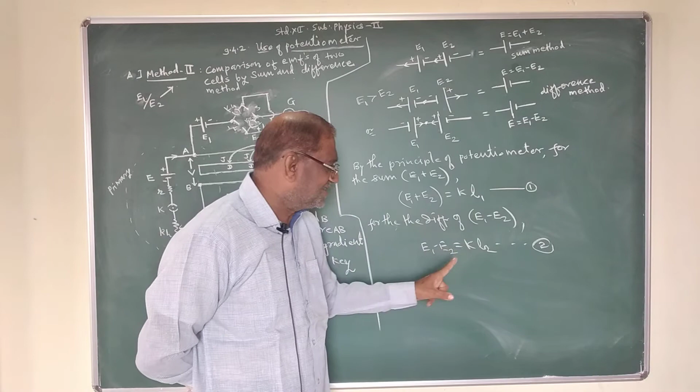This condition is called the balance condition of potentiometer for the difference of EMF of two cells. This difference balances the potential difference across length L2 of the wire, so that the galvanometer shows zero deflection, giving E1 minus E2 equals K L2 by the principle.

This is the first set, this is the first reading. Now we can take different readings if we change the applied potential difference.

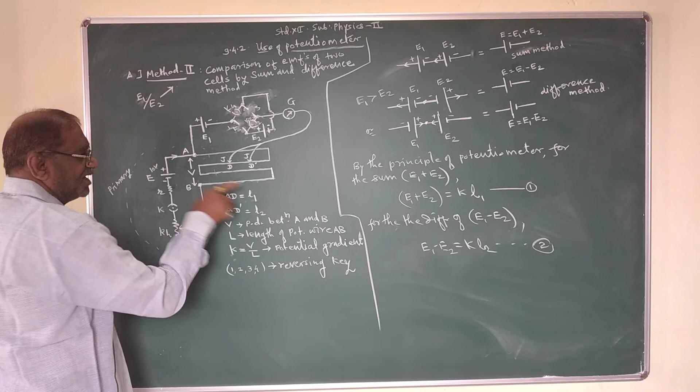With the help of the reversing key we can directly change this combination of two cells from sum method to difference method, that is, assist combination and oppose combination. We can change directly with the help of the reversing key for a particular applied potential difference.

Then you measure the corresponding balancing lengths L1 and L2, obtaining a number of readings of L1 and L2. Now from this equation, dividing...

E1 plus E2 upon E1 minus E2 is equal to L1 upon L2, equation number 3.

Now by using a mathematical rule, the componendo and dividendo rule, we can write this.

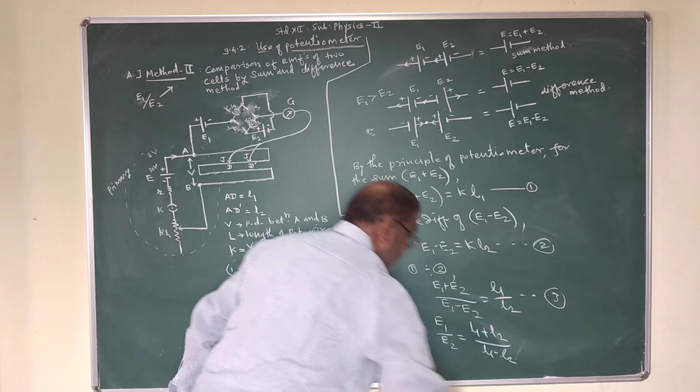These are the balancing lengths for the sum and difference of EMF of the two cells. We can directly measure them with the help of a meter scale, because this instrument is itself fitted with a meter scale, by which we can directly measure the balancing lengths L1 and L2, so that L1 and L2 are known.

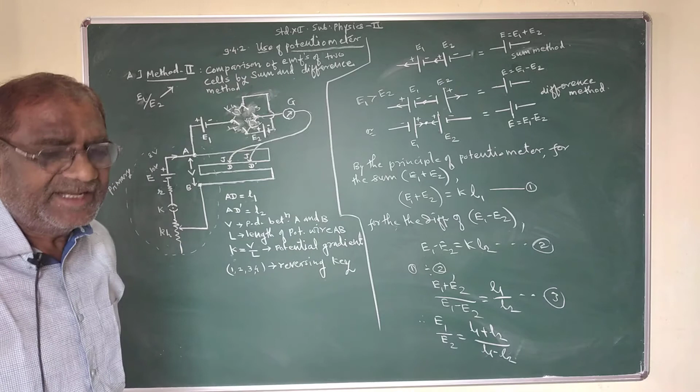Then by using this formula we can compare the EMF of two cells. So this is the experiment, one of the methods by which we can find the ratio of EMF of two cells.

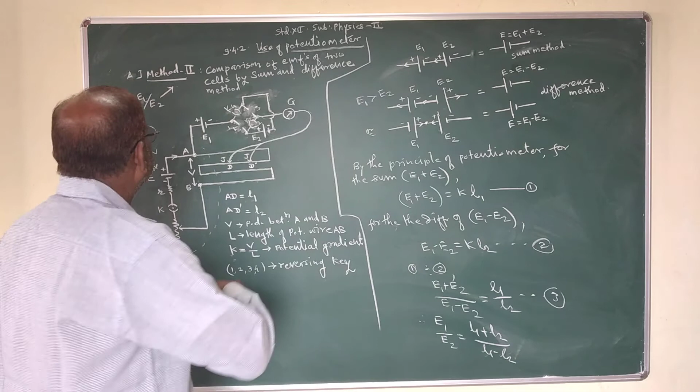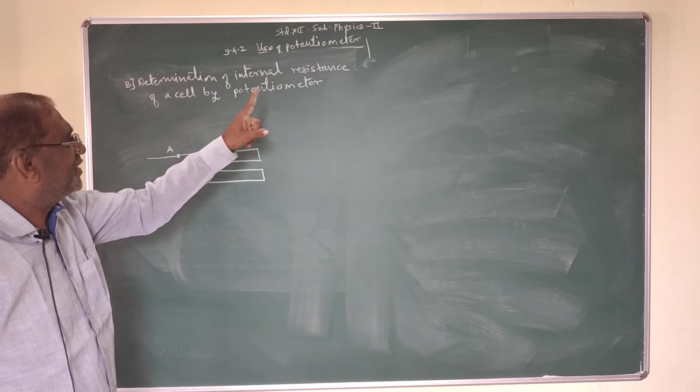Now the next article, the next use of potentiometer, is determination of the internal resistance of a cell by potentiometer.

We know that every electrochemical cell offers a certain value of resistance for the flow of electric current. This resistance offered by the electrolyte for the flow of electric current is called the internal resistance of the cell.

I think all of you know the electrochemical cell. An electrochemical cell is a device used for the conversion of chemical energy into electrical energy. This device is called an electrochemical cell, and every electrochemical cell consists of two electrodes.

One is the positive electrode and another is the negative electrode, and these two electrodes are kept immersed in the chemical solution we call electrolyte.

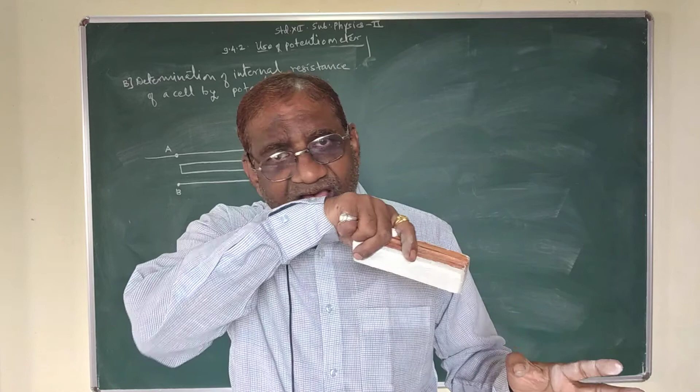Because of the chemical reaction taking place inside the cell in the chemical solution, there is transfer of charges, meaning ions, from one terminal to another, due to this flow of charges inside the cell through the electrolyte solution from one electrode to another electrode.

This gap of electrolyte between the two electrodes offers a certain value of resistance, as there is flow of electric charges from one terminal to another terminal, for the flow of electric current.

This resistance offered by the electrolyte to the flow of electric current from one terminal to another, one electrode to another electrode, is called the internal resistance of the cell.

So this value of internal resistance of a cell we can determine by using the potentiometer. For this purpose, first we have to make the electrical connection with this potentiometer for the determination of internal resistance of the cell.

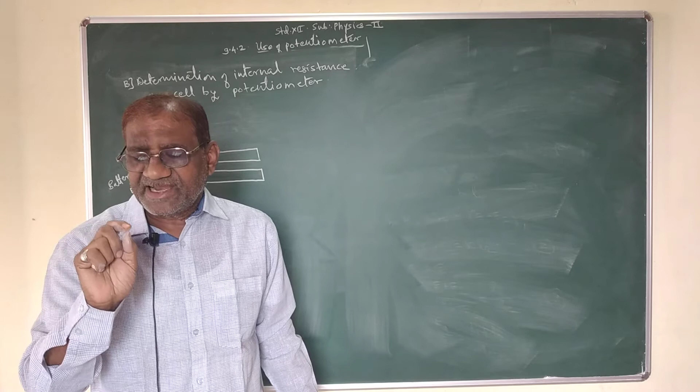This is the primary circuit, plug key, and this is the negative terminal, and this is the battery. Suppose this EMF is E1, the EMF of this. Now, this is the primary circuit, and in the secondary circuit, you are given a cell having certain EMF as well as certain internal resistance, so that the positive terminal of the cell, positive, this is negative, and this is the internal resistance of the given cell.

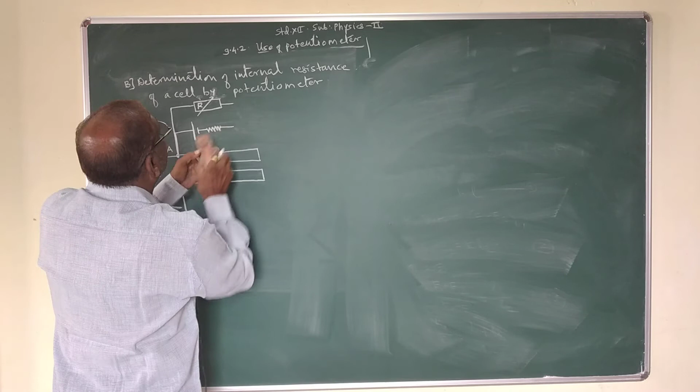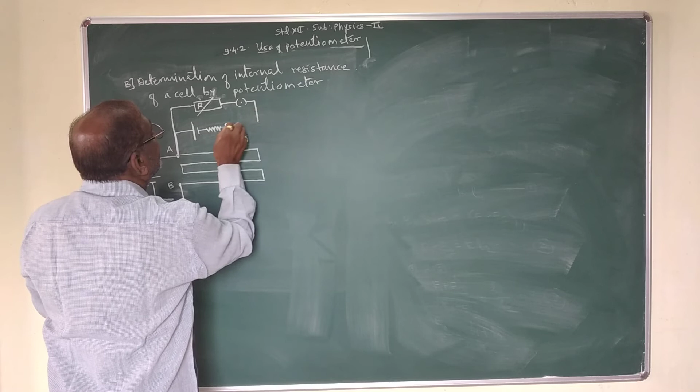In this way, and this cell has a known value of resistance, that is the resistance box. This is R, and this is the plug key, and this is the junction, and this is the galvanometer.

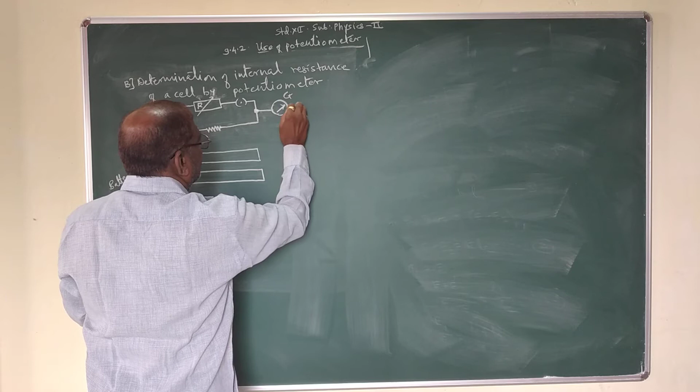And this is the jockey J, and this is another point, jockey, that is, this is D point, this is D dash point, A B, this is the circuit, this is the cell having EMF E, and this is the internal resistance of the cell.

So in this way, first you make electrical connection with this potentiometer.

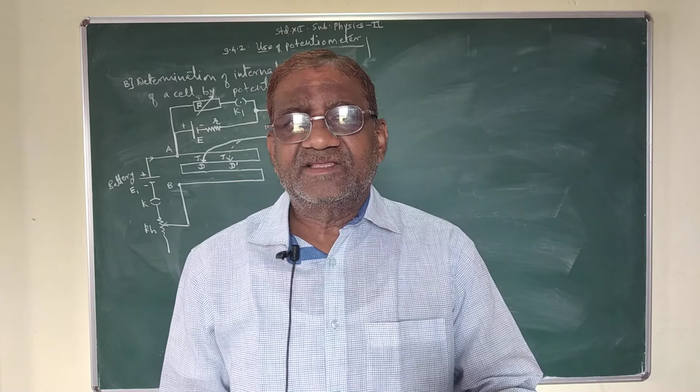Now, by using the potentiometer, we have to determine the internal resistance of a given cell, that is, we have to find the value of small r. This is the small r, its value we need to find. To find the value of internal resistance of the cell, we must know the necessary formula for the determination of internal resistance of the cell. First, we have to derive the necessary formula for the determination of internal resistance of a cell.

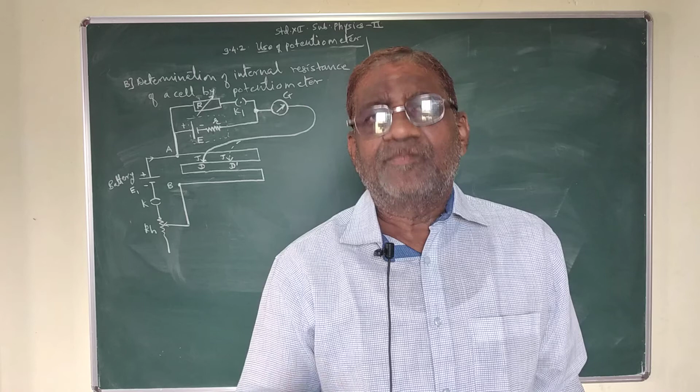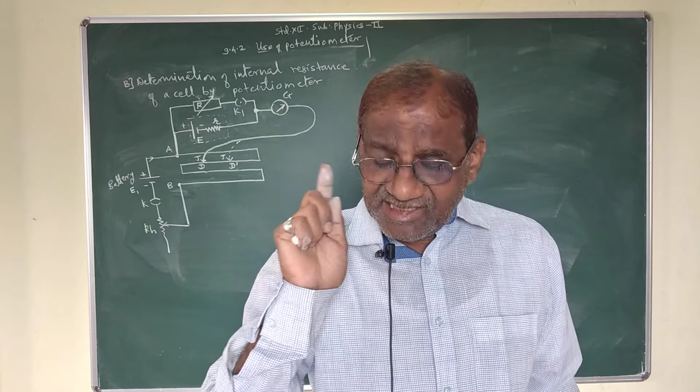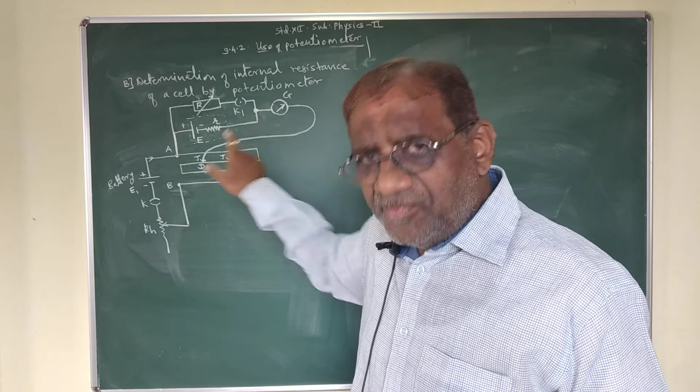And this formula for internal resistance of the cell we can obtain by using the principle of potentiometer and by using Ohm's law to this complete circuit. By using these two principles together, we will get a formula for internal resistance. By using this formula for internal resistance of the cell and by performing this experiment of potentiometer, we can find the value of internal resistance of a given cell.

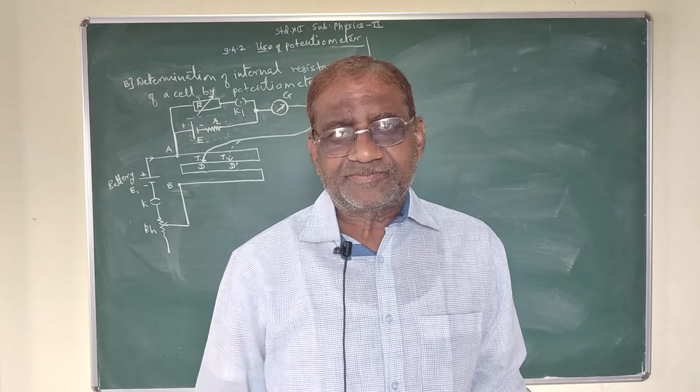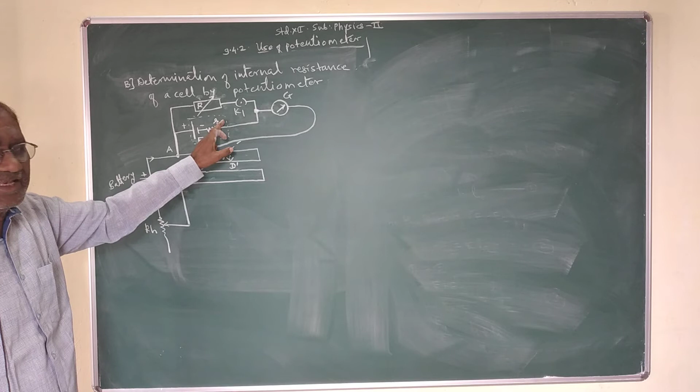The electrical connections are made as shown in the figure. The electrical connection for the determination of internal resistance of a cell is made as shown in the figure, such that the potentiometer wire AB having length L is equal to the length of wire AB.

This is the primary circuit. Let E be the EMF of the given cell, and let r be the internal resistance of the cell, the given cell.

Let R be the known resistance in the resistance box having a known value. This is the known resistance, and this is the galvanometer, you know this.

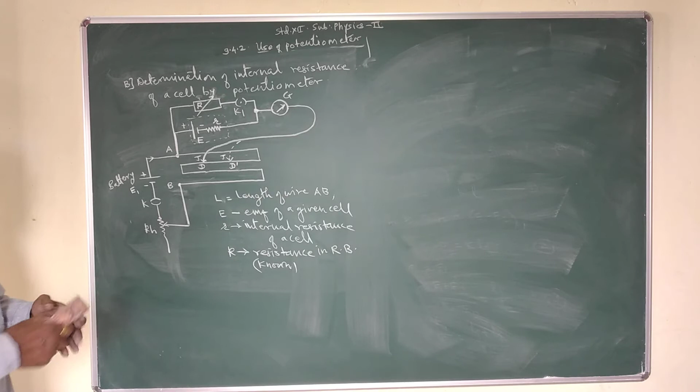Now the electrical connection is such that the potentiometer wire AB is connected in series with the battery eliminator, plug key and rheostat, by which we can pass a steady current through different branches of the electrical circuit.

Now, this cell of which we have to find its internal resistance, the positive terminal of that cell is always connected to the positive end of the potentiometer wire, while the known value of resistance, that is the resistance box, is connected across this cell through plug key K1. And the common terminal, that is C, the common terminal C of the resistance box and cell is connected to a sliding contact jockey which can slide on the potentiometer wire AB through a center zero galvanometer, by which we can observe zero deflection.

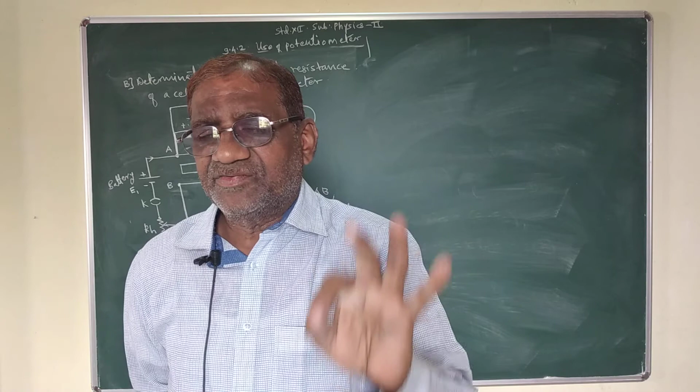So in this way, first you make the electrical connection with this potentiometer. After making the electrical connection, you start your experiment.

Now initially, close the key K in the circuit and adjust the rheostat so that a steady current flows through different branches of the electrical circuit. Now, keep the K1 key open, close the key K in the circuit, and K1 key is kept open. What happens then is there is flow of electric current in this direction, in this direction, in this direction, in this direction. Hence, this galvanometer shows some deflection in one direction.

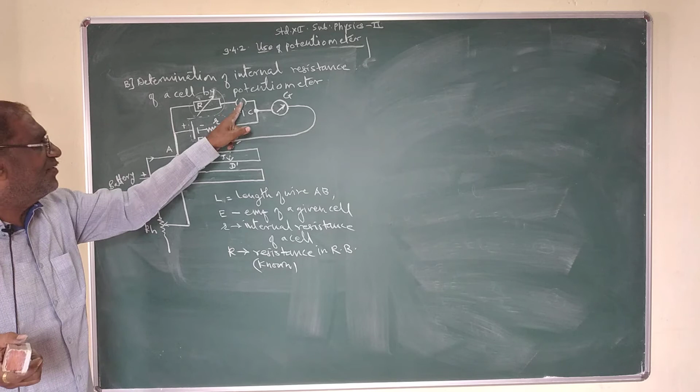That is, when the resistance box is out of the circuit, it is open. Initially close the key K in the circuit and keep K1 key open. Then there is flow of electric current through this cell in this direction, in this direction. Hence, this galvanometer shows some deflection in one direction, but we want zero deflection in the galvanometer.

So this zero deflection in the galvanometer we can obtain by moving the jockey on the potentiometer wire AB from point A. There is a particular point of contact of the jockey, say D point, at which this galvanometer shows zero deflection.

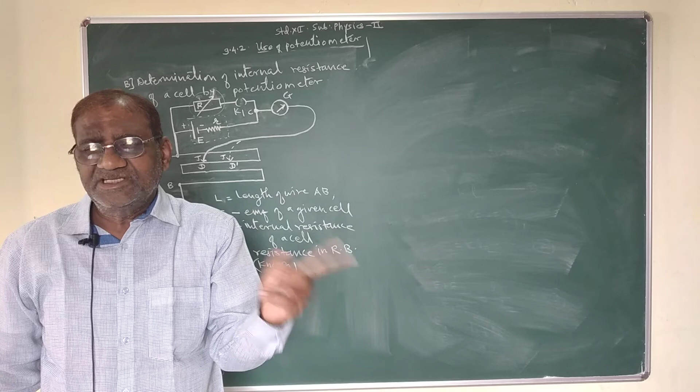तो अपने को जीरो डिफ्लेक्शन होना है। जीरो डिफ्लेक्शन के लिए एक ऐसा कांटेक्ट पॉइंट है जो वायर के ऊपर है, ये कांटेक्ट करते करते जाए। You touch the jockey at different points on the potentiometer wire AB.

There is a particular point of contact of jockey on the potentiometer wire AB. Say this point is D, for which galvanometer shows zero deflection. This condition is called the balance condition of potentiometer for the EMF of the cell. This EMF of the cell balances the potential difference between two points A and D of the wire. Then this galvanometer shows zero deflection. This is one of the conditions for obtaining zero deflection in the galvanometer.

Then you measure the balancing length, that is AD is equal to L1, be the balancing length, for the EMF of the cell. This is L1 we measure.

Now, by taking a suitable value, so that by the principle of potentiometer, for this case, you measure L1 length. Then by the principle of potentiometer, we can write E is equal to K into L1, equation number 1, where L1 is the balancing length.

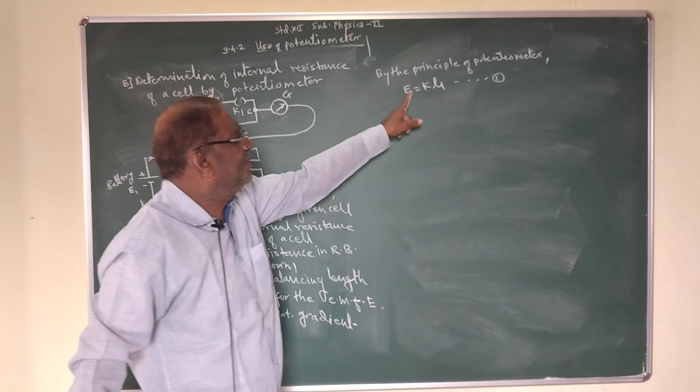On the potentiometer wire, it remains constant. So, by the principle of potentiometer, we can write: EMF of the cell balances the potential difference across L1 length of the wire, so that this galvanometer shows zero deflection. This is one.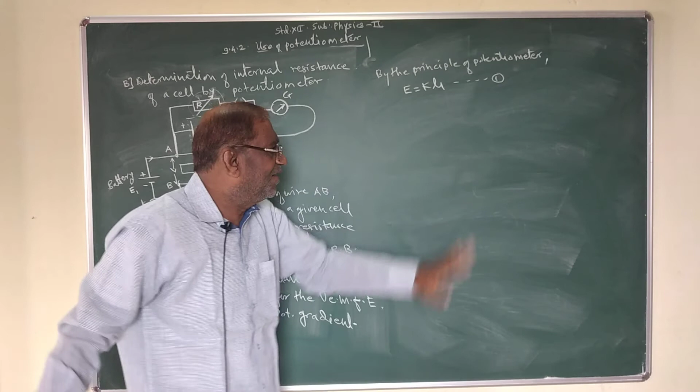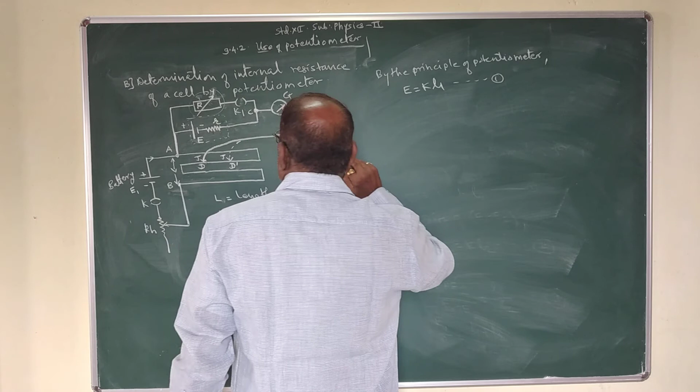First, we close the key K in the circuit and key K1 is kept open. It means that the resistance box is out of circuit. And if the resistance box is out of circuit, then there is flow of electric current in this direction. Hence, this galvanometer shows some deflection. For this deflection, we can obtain zero in the galvanometer with the help of the jockey, and then we measure the corresponding balancing length L1.

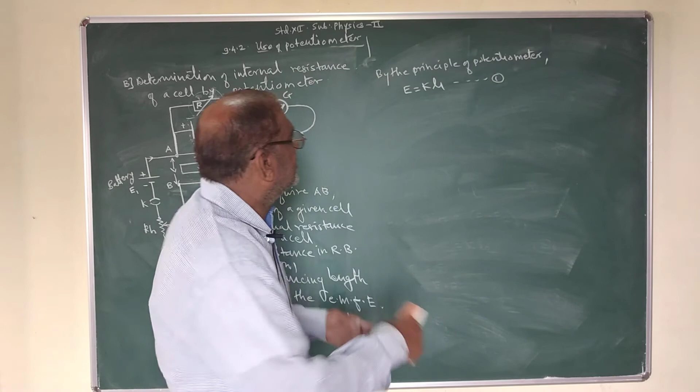So that E is equal to K L1. This is the first. Now, V is equal to, now by taking a suitable value of resistance in the resistance box. Now take out a suitable value of resistance in the resistance box.

Suppose R is the resistance taken from this box, and close the key K1 in the circuit. Then what happens? There is flow of electric current through this resistance, through this cell, and then through this galvanometer. Hence again this galvanometer shows some deflection in one direction.

For the same case, now close the key K1 in the circuit, and by taking a suitable value of resistance in the resistance box, say R is the resistance taken from this box, then there is flow of electric current through this resistance as well as through this cell and through this galvanometer. This galvanometer again shows some deflection.

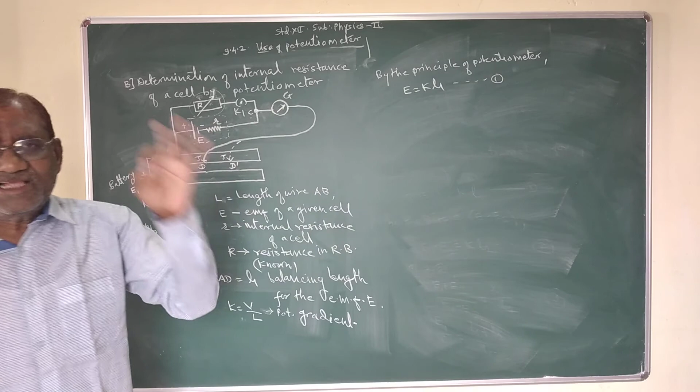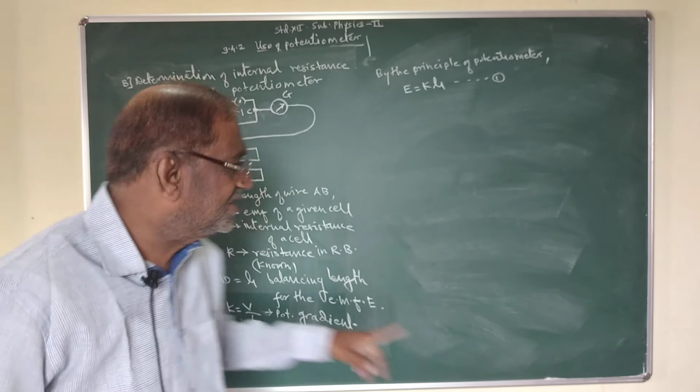But we want zero deflection in the galvanometer. So this zero deflection in the galvanometer we can again obtain by moving the jockey on the potentiometer wire AB. There is a particular point of contact of jockey, say this point is D dash on the potentiometer wire, for which this galvanometer shows zero deflection.

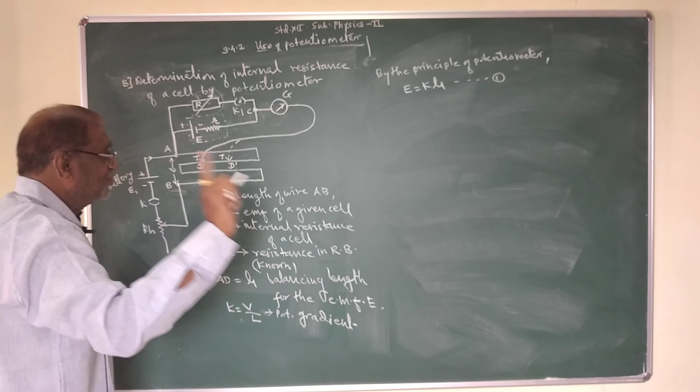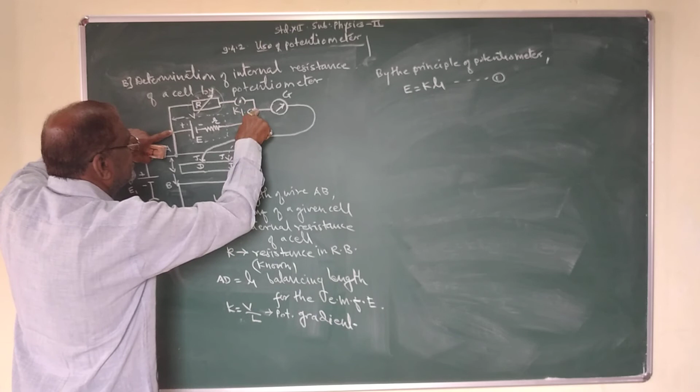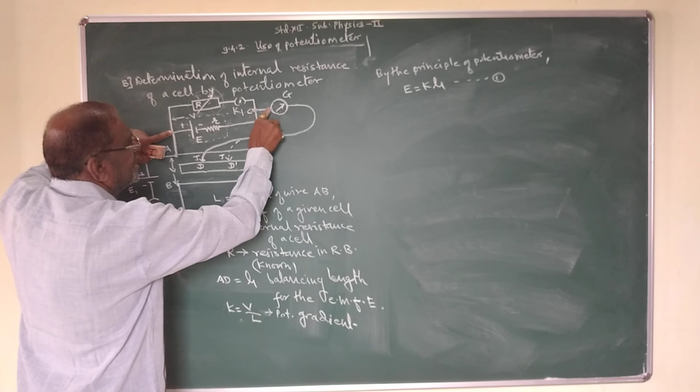This condition is called the balance condition of potentiometer for the terminal potential difference, because out of E, some potential difference is produced across the resistance. For this terminal between these two points, there is a terminal potential difference of the cell, that is the potential difference across R resistance, and because of this potential difference there is flow of electric current through this galvanometer. Hence this galvanometer shows some deflection.

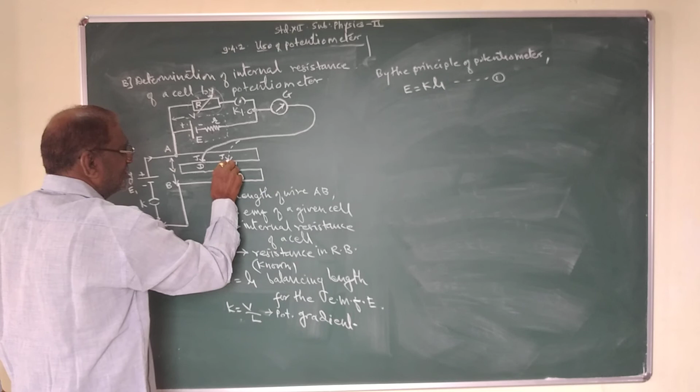Again we obtain zero deflection in the galvanometer by moving the jockey on the potentiometer wire, so that we get the corresponding balancing length L2, that is AD dash is equal to L2. This is the balancing length for the terminal potential difference.

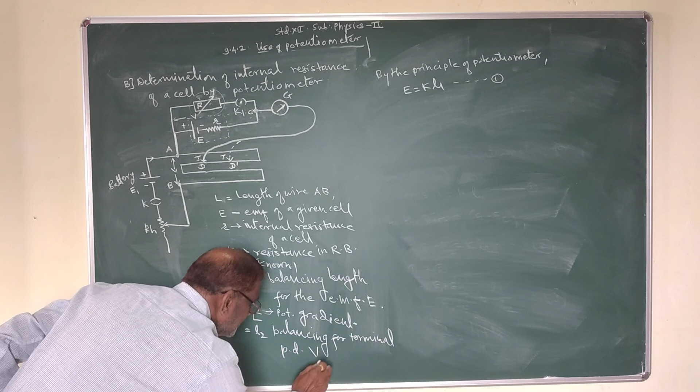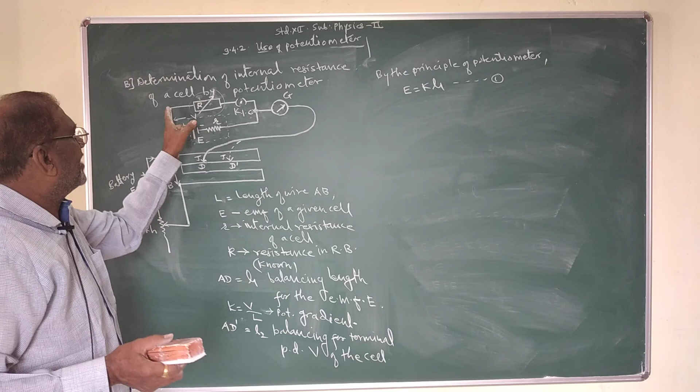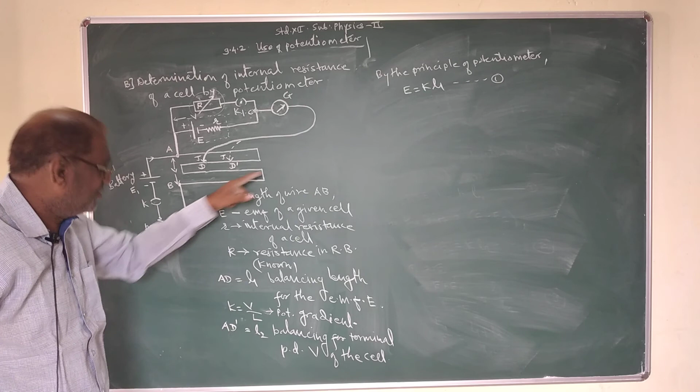V of the cell. It means that the potential difference across R resistance, when this galvanometer shows zero deflection, the potential difference across R resistance balances the potential difference across AD dash length, balances the potential difference across L2 length of the wire. Then this galvanometer shows zero deflection, so that by the principle of potentiometer, for terminal potential difference of the cell, we can write V is equal to K into L2.

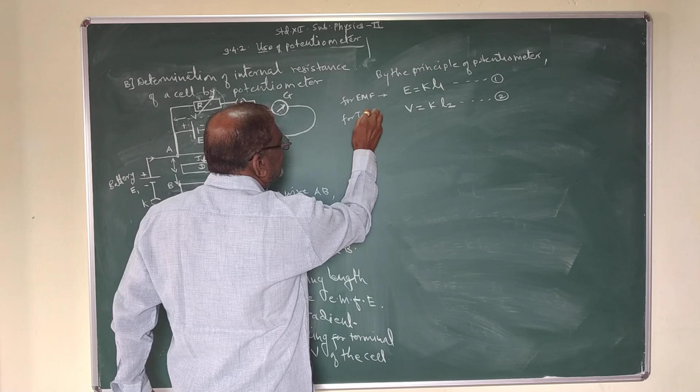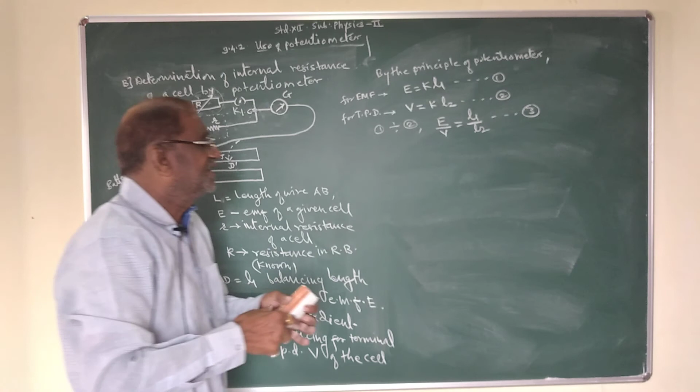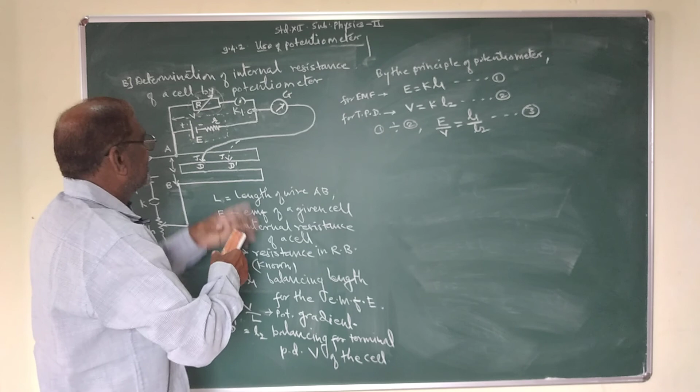This is for EMF. For EMF of the cell, we get this condition, and for terminal potential difference, we get this condition. So dividing 1 by 2, that is E upon V is equal to L1 upon L2. Equation number 3 means, by the principle of potentiometer, we get the ratio of EMF of the cell to its terminal potential difference is found to be equal to the ratio of these two balancing lengths, that is L1 upon L2. Now, this circuit is the secondary circuit, we will remove it from here.

ये आर रेजिस्टेंस है, ये ईएमएफ है, और ये इंटरनल रेजिस्टेंस है, और ये ऐसा है, ये प्लग की है।